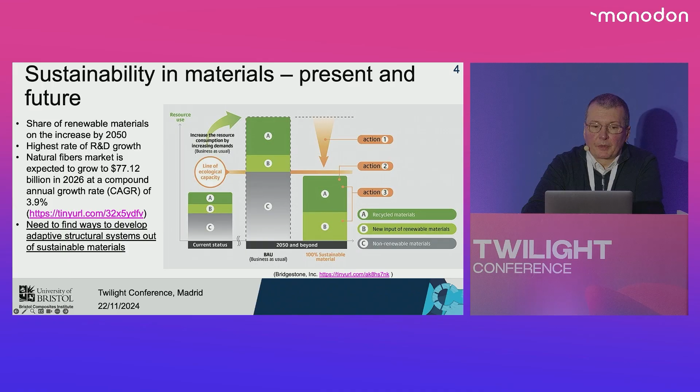If you look at the architectural industry, they have already started to solve the question a long time ago. I just give you a couple of examples related to the meteosensitive pavilion developed at the University of Stuttgart. These are meteosensitive surfaces made out of 2 layers of different types of oriented wood. So there is a change of the surface when there are changes of the relative humidity surrounding the building and also the temperature. And you can also find similar examples at the Architectural School of the University of Toronto. So architects have already been playing with this kind of concept for a while.

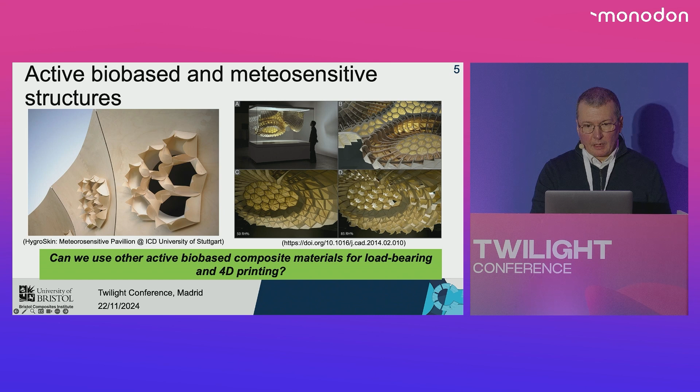So our further question is, can we use other active bio-based composite materials with load-bearing characteristics, but also using novel manufacturing techniques like 4D printing? In terms of natural fiber materials, there is a fiber which is extremely interesting, and it is flax. Flax has a stiffness similar to fiberglass, and the properties of flax from a mechanical perspective have been known since antiquity. But as a composite, it actually also has a long history in terms of reinforcement.

The Gordon Aerolite was a phenolic flax prepreg with 70% volume fraction of flax, developed back in 1939, and was developed at the time also to find a suitable solution to the lack of supply chain of aluminium alloys just at the beginning of the Second World War. And the Gordon Aerolite as a composite was used also to prototype some fuselages of the Spitfire.

Very interesting composites. At the time, they already started to experience these thermoforming processes that were allowing them to make composites up to 7 millimeters of thickness. And 7 millimeters of thickness have been only reached recently for carbon epoxy composites, for example, in the wing of the Airbus A350 or similar types of composite. Already at the time they were doing that kind of work.

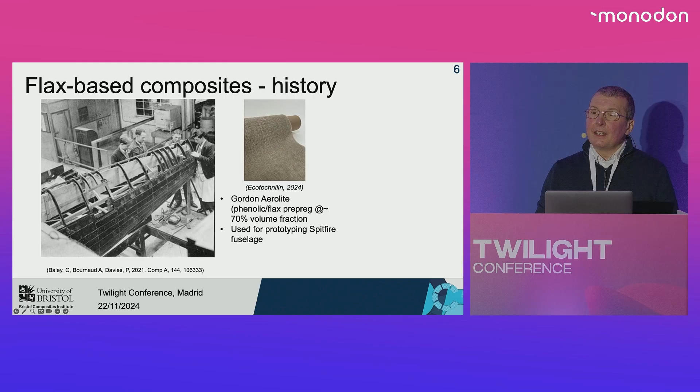A composite that was also, quite interestingly, insensitive to relative humidity. At the moment, Gordon Aerolite is still the stiffest composite with natural fibers on the market, well, for what is available on the market. And in terms of stiffness, in terms of really tensile strength, only recently some epoxy flax prepregs with 50% volume fraction reinforcement have managed really to reach the tensile strength of the material.

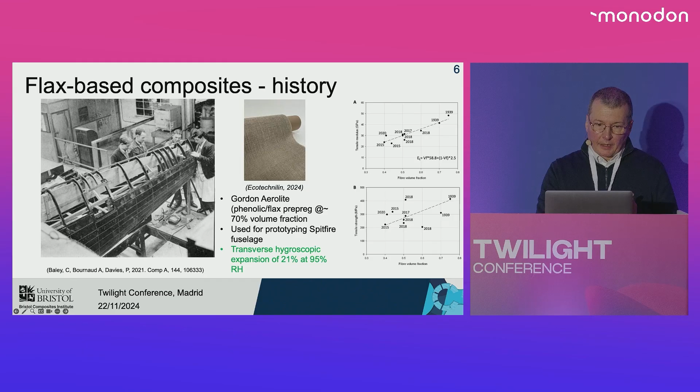Quite interesting, flax has got a hygroscopic expansion of 21% at 95% relative humidity, which is the largest among the technical natural fibers that you can find around. So it's an interesting type of reinforcement, and in terms of adaptive structures, nature really suggests a way to use these types of natural fiber composites as actuators. And the inspiration comes directly from the architecture of the pine cone scale.

If you look at pine cone scales, they are made out of a passive layer, a stiff layer with a low axial swelling, coupled with several multi-layers of active components. These active layers are soft with high radial swelling. In composite parlance, this is an asymmetric unbalanced type of laminate. It is a 0-90 with 90 at different stacking sequences. But these types of configuration, when there are changes of relative humidity, allow, for example, to change the curvature from the dry state to a wet state.

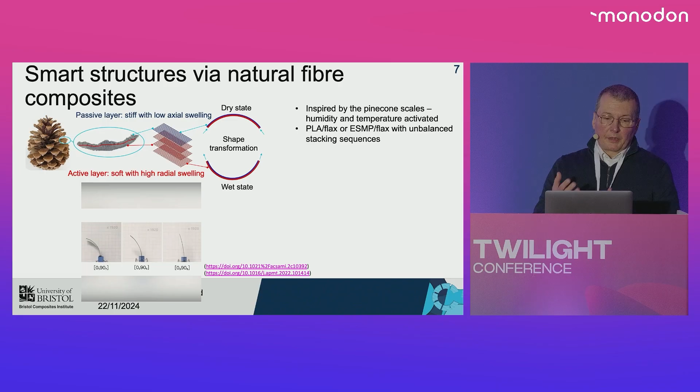And inspired by pine cone scales, we have developed several classes of thermoplastic composite with PLA, but also epoxy, a shape memory epoxy flax composite with this kind of unbalanced stacking sequences. Just to give an idea what happens when you use this type of architecture with these epoxy flax fiber composites, and when you have changes in humidity, you can see in these quite accelerated videos, the actuators have this type of in-plane coupling between axial and transverse deformation. They provide this kind of out-of-plane change of curvature when there are changes of the relative humidity, or when you take the actuators and you chuck them in water.

And the final curvature depends on the architecture in these types of composites. So you have a one-to-one correspondence between the architecture, the type of composition, and the relative humidity. And the interesting fact is that they can be also made using 3D or 4D printing. By 4D printing, we mean 3D printed structures with materials that evolve over time. And these types of actuators are actually load-bearing. They have bending stiffnesses up to 14 gigapascal, which starts really to be quite interesting, and similar to the equivalent type of composite that you would make using fiberglass.

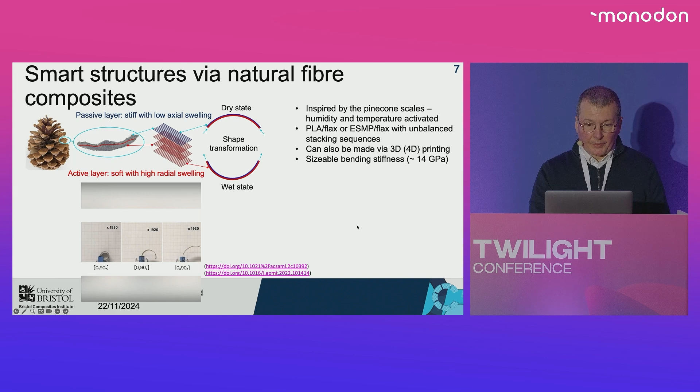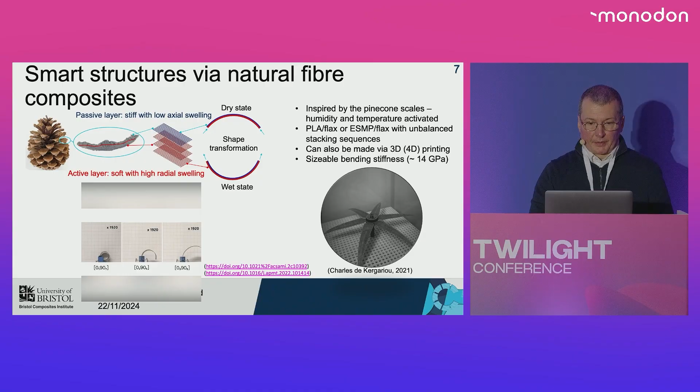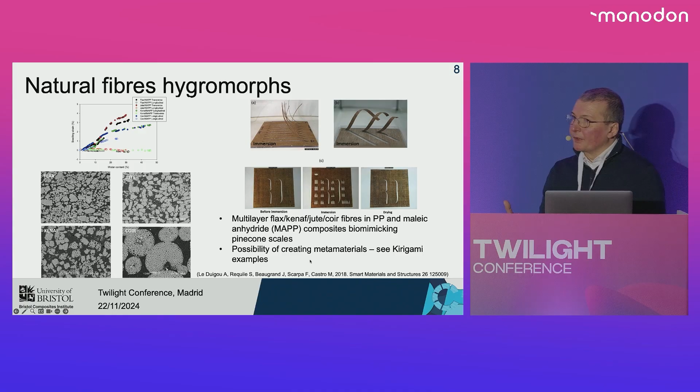And just to show you, when we use 3D printing, 4D printing characteristics, the type of really complex structures, this is a calla lily that forms when the relative humidity is changed from 20% to 50%. Flax is not the only natural fiber that can be used for these types of actuators. You can also use kenaf, jute, coir fibers. The matrix can be a thermoplastic, polypropylene, or maleic anhydride, not only the thermoset that we have seen before. Quite interesting, you can really make this type of hygromorph composites and then apply every type of technique, from kirigami, architecting, to obtain these types of metamaterials, which are bio-based in this case.

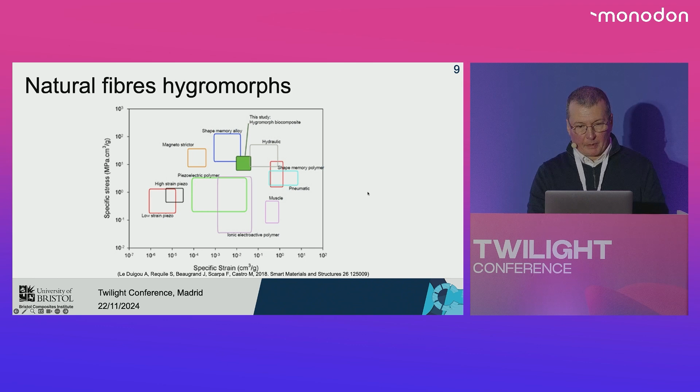We have made these types of composite using classical stacking sequence laminates and manufacturing processes, also using epoxy shape memory polymer matrices. The shape memory polymer matrices allow us to have one degree of freedom more in terms of design space. So we can combine initial moisture content inside the composites, the desired curvature also given by the stacking sequence, and the variation of the temperature through the Tg of the polymer. In other words, with the same type of hygromorph actuator, we can store two different shapes, not the single one that we have seen before.

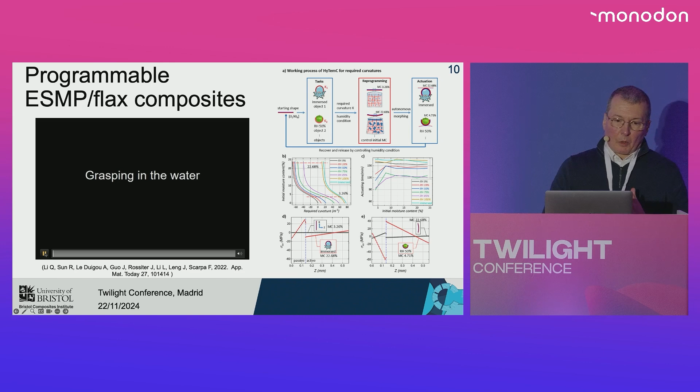And just to give you an idea of what we can do in that sense, this is a classical example in soft robotics. You can see this hand with four fingers. The four fingers are the four actuators. In that case, we start with a specific moisture content. We put the ball in full immersion, and then we can grasp the ball. We are talking about a ball that is 20 times the weight of a single actuator.

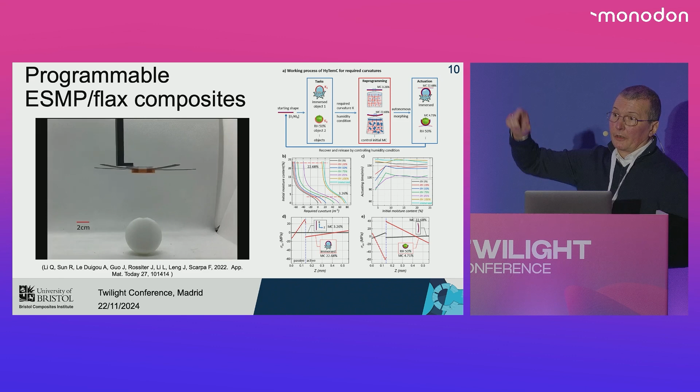So this is exactly the same configuration, but now at 50% relative humidity during desorption the shape changes again, and we can still grasp the ball. So again, we have two ways of grasping the ball in different environments. It's a different type of passive configuration. My colleague, Professor Shinachi, yesterday showed some wonderful examples of a completely passive type of actuation. This is another type of passive actuation, but it simply takes advantage of the surrounding environment.

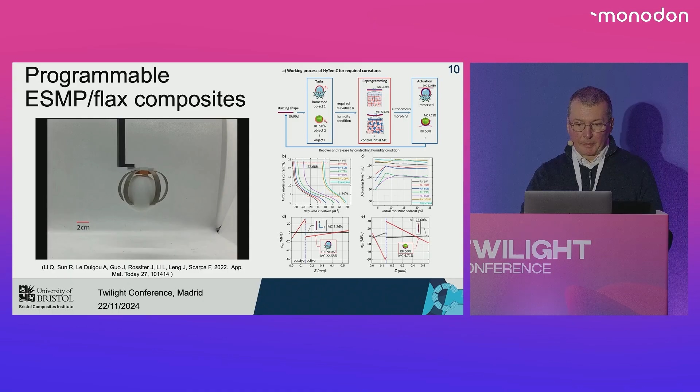We have also been playing with these types of hygromorphs to make metasurfaces, so complex surfaces with different types of curvature and shape. In this case, we also architect the metasurface using electroadhesive copper films for grasping. By architecting the films plus positioning different types of hygromorphs with different characteristics, we start to obtain these large handling capabilities.

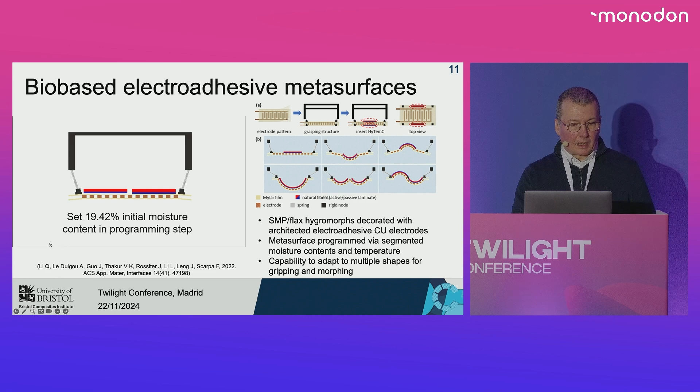Just to give you an idea, this is a prototype that performs autonomous actuation at 50% in desorption, and it has been architected in such a way that we have two series of hygromorphs that support these electroadhesive copper films. We have the change of the architected shape with the desorption. At the same time, we activate the electroadhesive copper films, and we can grasp this kind of very complex surface.

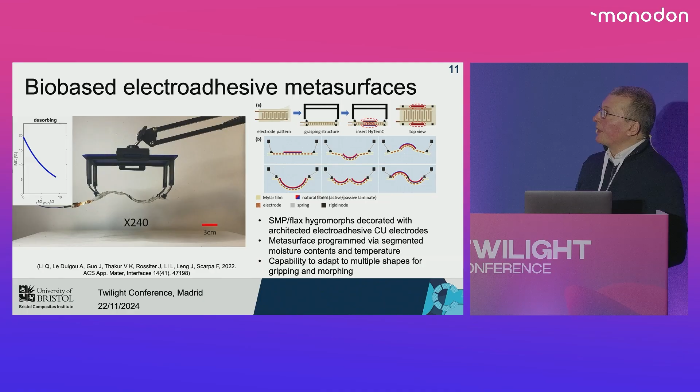Exactly the same type of metasurface can also do the double concave type of shape, because in desorption, due to the different architecture in a different set of patches, we can obtain this double concave configuration, always with the same relative humidity in desorption. We then activate the electroadhesive copper films, at between 3.5 and 4 kilovolts per millimeter, and we can grab a different, yet complex surface.

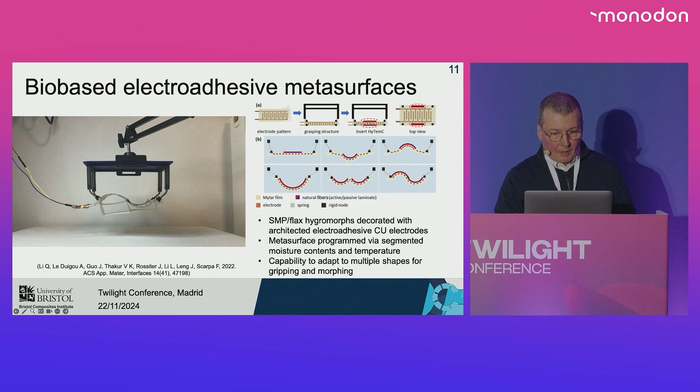What we have seen so far is very much on the bio-based side, but it's also possible to use softer materials. We have been working on this class of bio-based alginate poloxamer hydrogels with different compositions, and we have developed techniques to control the pore size at multi-scale level. Typically, the quasi-static stiffness of these composites under compression is between 90 and 130 kilopascal.

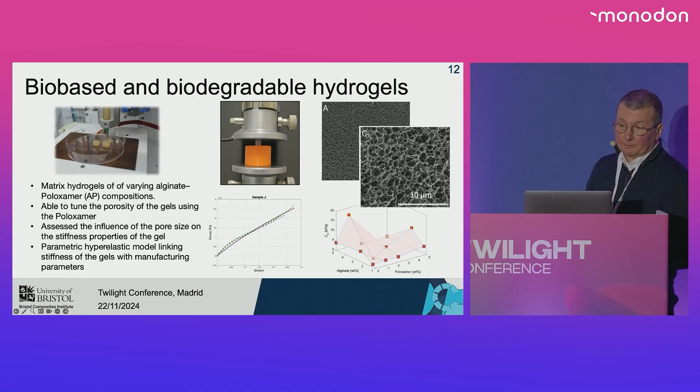The interesting fact is when you use this hydrogel base with particular classes of natural fibers, not necessarily flax, but another class that is under patent, and you assess the vibration transmissibility properties, you obtain a damping material with a loss factor between 18 and 25%, but, quite staggering, dynamic moduli between 7 and 15 times the static modulus within 100 Hz or 300 Hz. This is a frequency range that is quite difficult to handle for most of the fossil damping materials used on the market.

And actually, the loss factors increase with the base acceleration. Quite interesting. We have done this test up to 3G. In essence, it is a bio-based material with a performance equivalent to fossil elastomers, and we have a patent going international from April 2025. We actually discovered these properties almost by accident, while we were trying to develop the morphing capabilities of these hydrogels. So lateral thinking and luck sometimes play a role in research.

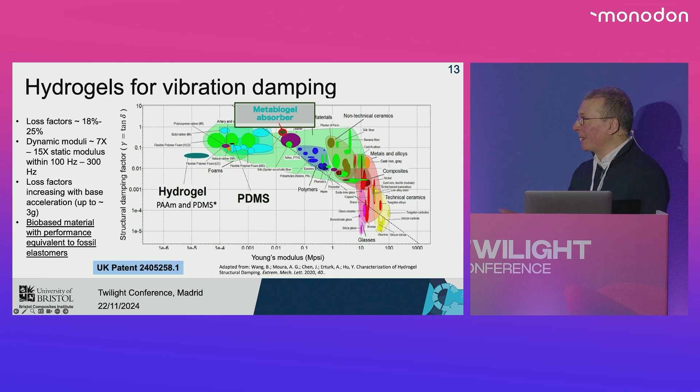But this hydrogel base can also be used with the flax fiber that I've shown before. So we have done this composite alginate with flax fiber up to 3.5% weight fraction. These alginates are cross-linked with calcium chloride. They can be bioprinted, but they can also be made using dialysis techniques, so you can scale up the manufacturing.

And the fibers are not long fibers that are embedded within the hydrogels. We ball mill, so the dimension of these short fibers are around 25 microns of length and 15 microns of width.

But we have tested fusion resolution during printing, and what we have noticed is that the flax fibers really enable very close printing, like reinforced filaments that you would use in 3D printers with thermoplastic materials, and there is no particular fusing that we have observed, which is good for bioprinting and for the resolution of high-quality structures. The flax also contributes to increase the viscosity, but this happens with flax fibers up to 1% of weight fraction.

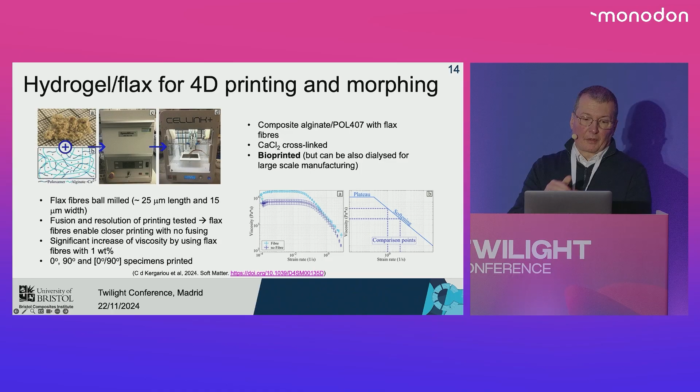And the same types of stacking sequences that we have used with the previous types of load-bearing hygromorphs have been used also to manufacture samples here. What we have observed first is you have a general increase of stiffness with the increase of the weight fraction. This is expected, but because of clustering reasons, the best tensile strength is always around 1% of weight fraction.

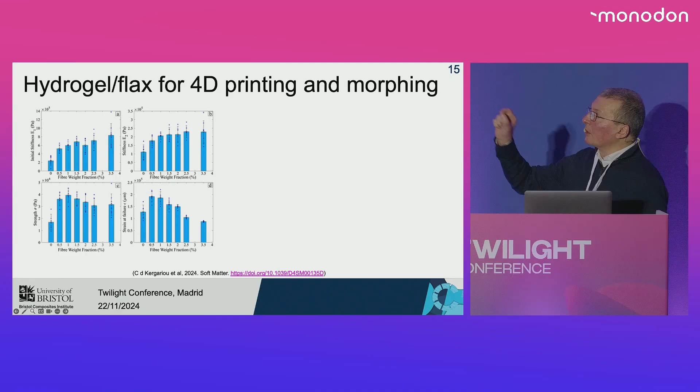And also, if you look beyond the 1% of weight fraction in terms of stiffness, there isn't a big increase. So diluted dispersions already work quite effectively, not only in terms of reinforcement properties, but also to provide this type of shape morphing properties when we have changes of relative humidity in the surrounding environment. In this case, it's not only the flax that acts with the hygroscopic strain to provide the overall shape morphing. It is also the hydrogel that contributes to the hygroscopic deformation.

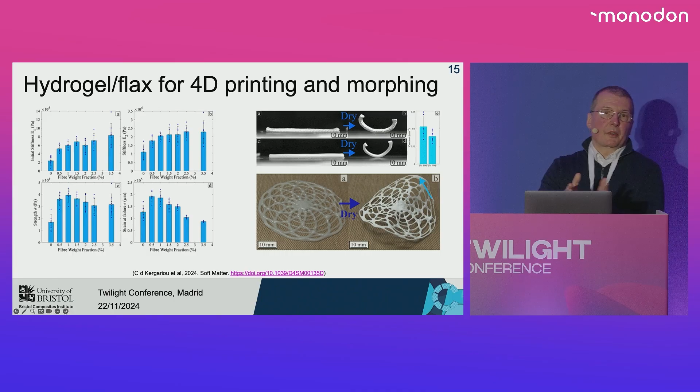And you can see over there an example. We printed a rosette in wet state, and when it's put in dry state, which for us is typically 20–25% of relative humidity, we have this change of shape.

If you're interested in more load-bearing characteristics for the printing, we have done already some work within this project in collaboration between the UK Defence Science Technology Laboratory and the equivalent in France, the AID, Agence pour l'Innovation de la Défense. And this is a partnership that we have with the IRDL laboratory in Brittany. So we have developed the baseline materials, the baseline coatings and composition. And the IRDL developed a special type of rig to make long fiber PLA flax filaments.

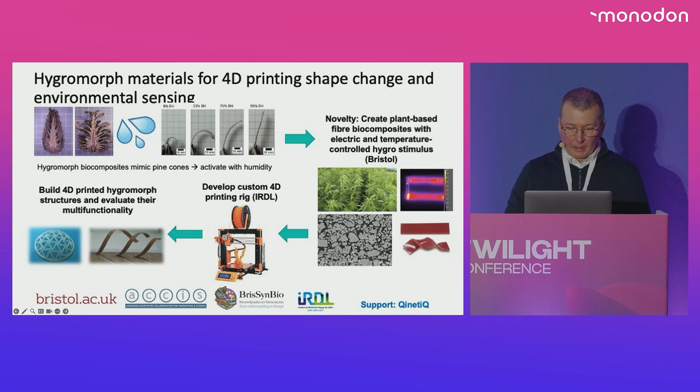Something that needs to be understood when you use natural fibers is the effect of the porosity of the fibers in the composites. Composites made using natural fibers have not only porosity in the matrix and at the fiber matrix interface, but also inside the fiber itself, because of the presence of the lumen. So we have a multi-scale porosity, and you need to consider the porosity in terms of efficiency of the actuation. And the porosity is also important to determine the characteristics of moisture desorption.

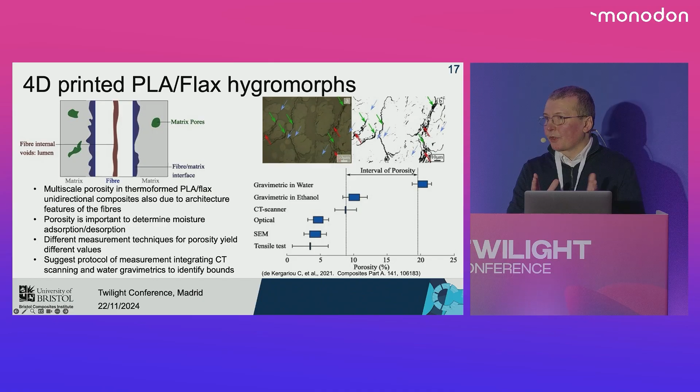So we had to develop a special type of measuring technique beyond the classical gravimetric technique in water that is used to assess the porosity of classical composites. So we made by thermoforming several PLA and flax composites. And in essence, if you really want a good indication of the effective porosity in these types of natural fiber composites, you will need to integrate computed tomography scanning and water gravimetrics to identify bounds. And if you don't have access to CT scanning, carrying out gravimetric testing in ethanol is probably a better option, because we have seen that it is slightly closer to the CT scanning.

Another aspect that in 4D printing is quite important is manufacturability. I'm quite happy that the previous talk was already raising some of those points, but especially when you use these types of long fiber reinforced filaments, you have all the issues related to the initiation of fracture in the composite at the interfilament interface. These flax fibers are made out of twisted yarns, so you have problems with the yarn matrix interface. It depends also where you need to cut the sample, and because you need to have those types of loops in order to make a different stacking sequence actuation, you have this type of imperfection.

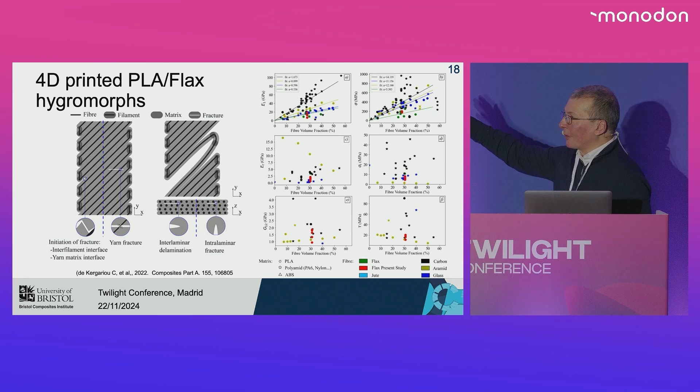And if you look in terms of general performance, in terms of stiffness, in-plane shear and tensile strength and so forth, they're probably not the best in the market. But they provide the actuation and still load-bearing capabilities.

And just to give you an idea how their stiffness evolves with the moisture content or relative humidity, in the longitudinal direction, over there you see two different Young's moduli. In general, in this kind of natural fiber composite, you have almost a sort of bilinear type of behavior under tension. So we take really two moduli to give this indication of stiffness.

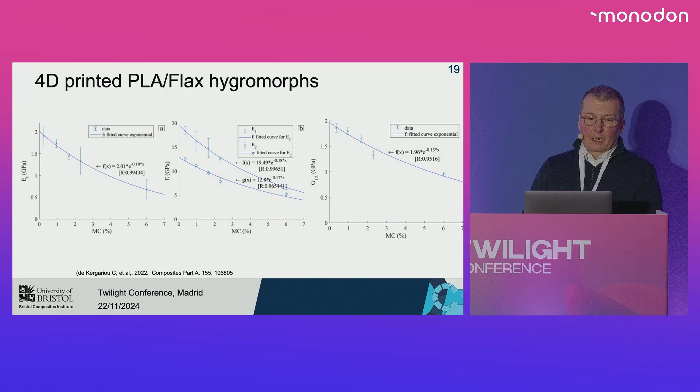But you can see that there is a strong decay, for example, from 20 gigapascal down to 7 gigapascal in the longitudinal direction. Transverse direction is obviously matrix dominated. In this case, it's PLA. So you go from 2 gigapascal to 0.7 gigapascal.

It is also possible to use, with these 4D printing techniques, more sophisticated ways to design complex structures. And over there, we have developed this voxel-based finite element algorithm to deposit the filaments for target optimized curvature architectures. Some of the speakers at the session before could suggest to me loads of more sophisticated ways to do this kind of job better.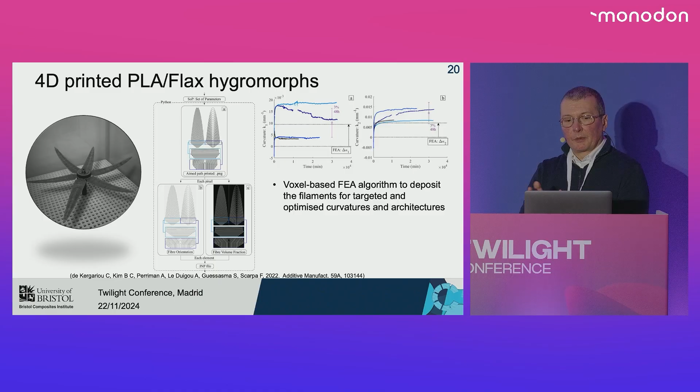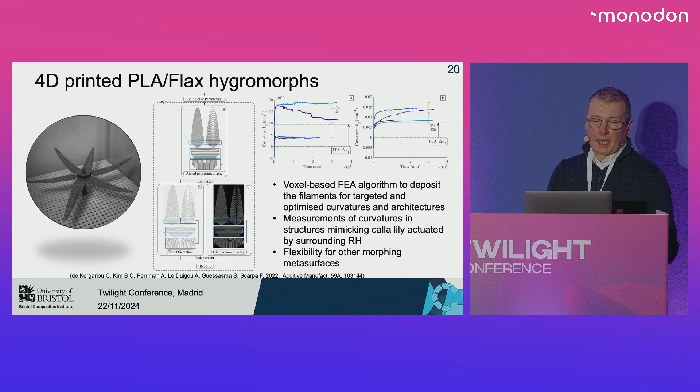But what is also important to consider is you need to incorporate manufacturing constraints, because of the way that these filaments are deposited. The model could provide a good response on a single curvature, but on the local transverse planes, things may be a bit more fuzzy. But in essence, these types of 4D printing techniques are quite flexible, and you can really design different types of morphing metasurfaces.

And those composites can be used as actuators and sensors in both hydrocarbon and water environments. So they are sensitive to fuel vapors and water relative humidity, and quite interestingly, the stiffness varies from the wet state from around 100 megapascal up to 90 gigapascal in tension. So we are talking about some considerable load-bearing characteristics. The architecture is very similar to the pinecone scales that we have seen before, but again, they react to different surrounding environments. I would say also more challenging, because oil spillage is still an ongoing problem.